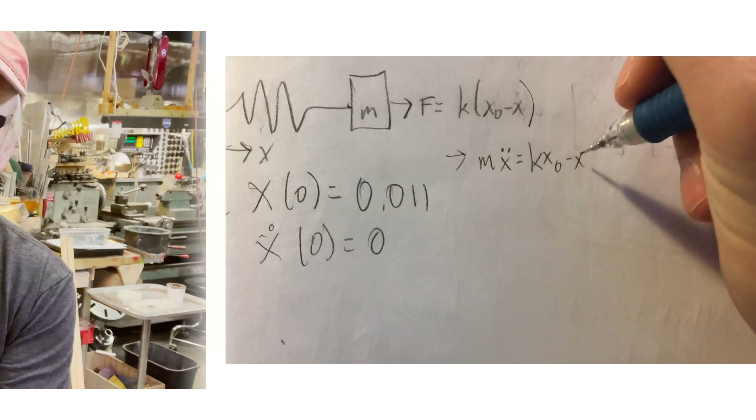But the most important question here is why? Why do we write it down? It's not just so we can show it off, it's so that we and others can learn from mistakes. Learning from mistakes saves time and money, and that is a very powerful thing.

In a lot of TV and movies, you'll see an engineer take a little bit of this and a little bit of that. Oh no, it doesn't work, just hit it with a hammer. Oh my god, what do you know? He's a genius. The data just doesn't justify this test.

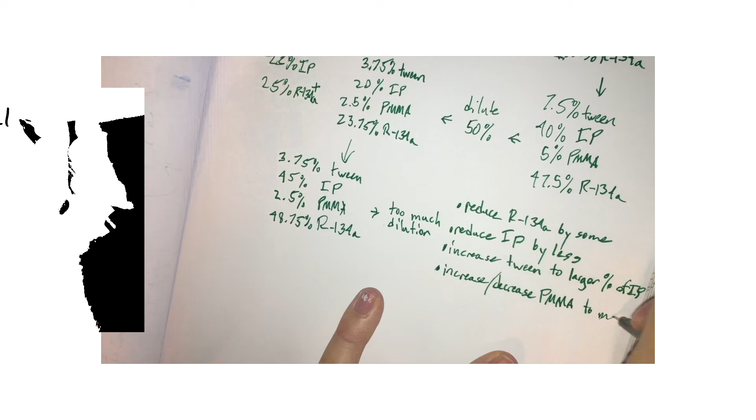Of course, in the real world, it doesn't work that way, as much as we'd like it to. No, in the real world, we can make predictions based solely on observations, and especially mistakes that other people have made. These observations have led to the mathematical laws I've presented on my channel before, which have been built up over centuries as extremely useful tools by experimentation, leading to even more observations. And the result of this is we don't have to rely solely on trial and error, which is an undeniably expensive approach. Instead, we can make predictions on how our designs will function before they're even built.

So if you're thinking about designing something new, my advice is sit with it for a little while. Make some serious predictions, challenge your own hopes for the design, do some modeling. If you do this, time and money will be on your side.

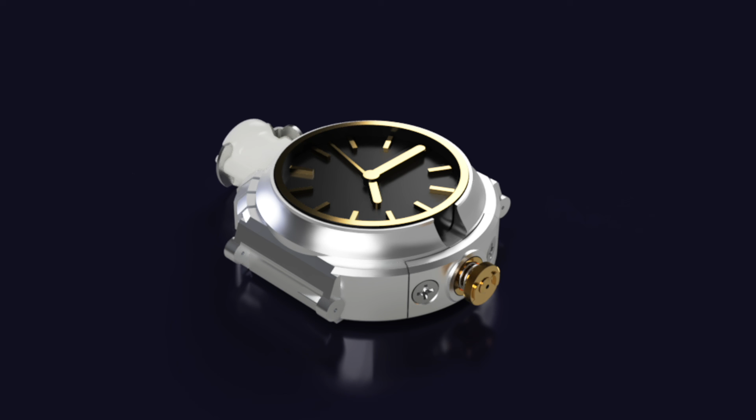This is the approach I took with this design. I thought, what can I do with current fluid web shooter technology that makes a unique and practical web shooter? I want concealability, I want performance, I want changeability.

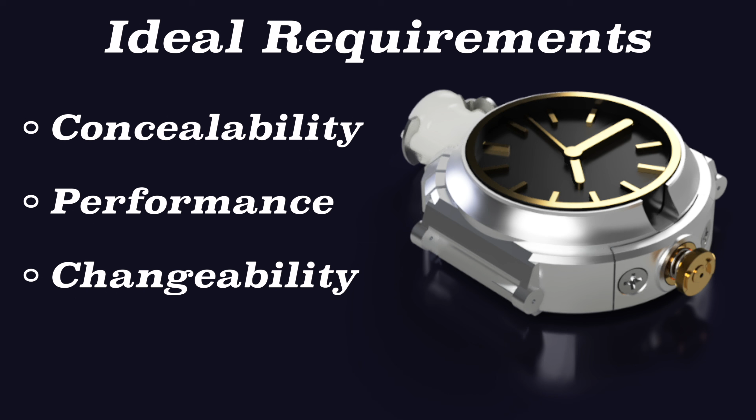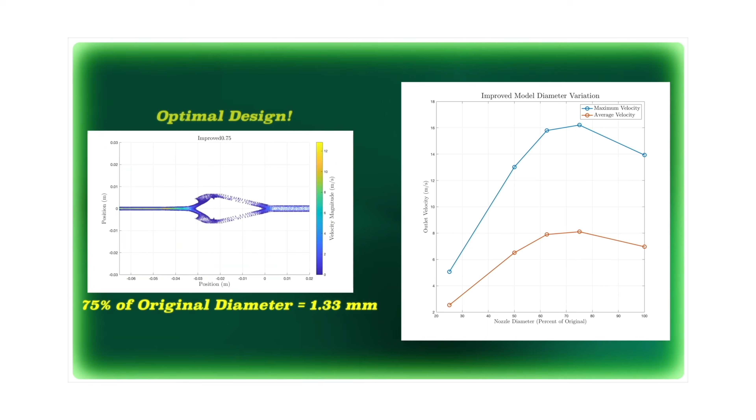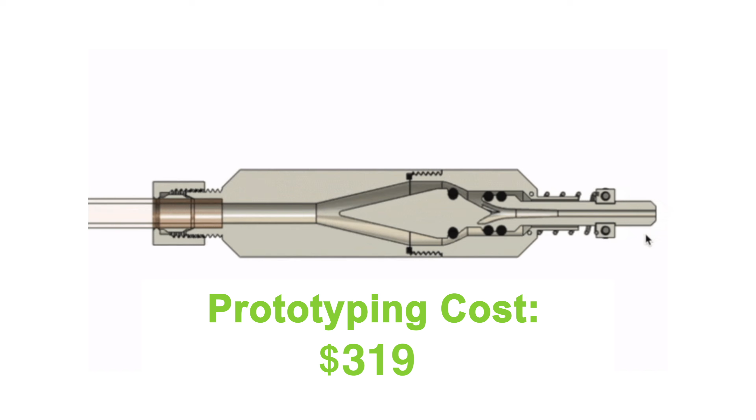Concealability definitely means the web shooter had to be small, and with my new research into the effect that common viscous fluid laws have on web shooter performance, I was able to consider the optimized valve geometry I presented in my last video. I designed a valve with this exact geometry as part of a push toward product development for dragline dynamics. If you don't know what that is, just please watch any number of my videos from the last few months. But the prototyping costs were too high, so I figured making a smaller version of this was the perfect chance to accomplish concealability and cut down on material costs.

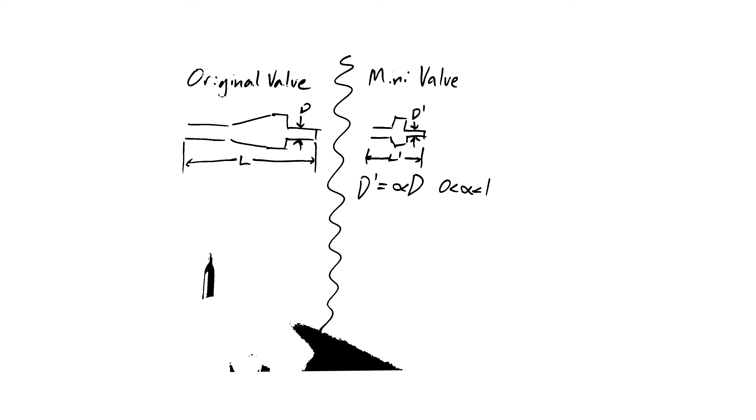I assumed the scaling law for viscous fluids to be the Hagen-Poiseuille law. That is, I hypothesized that I can make this valve perform similarly while decreasing the size. Decreasing the radius hinders the flow, but decreasing the length helps the flow. A similar flow with the same pressure drop and fluid properties means that the ratio between the fourth power of the radius and the length must remain the same. So whatever factor by which we scale the radius down, we must scale the length down by the fourth power of that factor. This scaling gave me a new valve, which is simultaneously small but theoretically does not sacrifice performance.

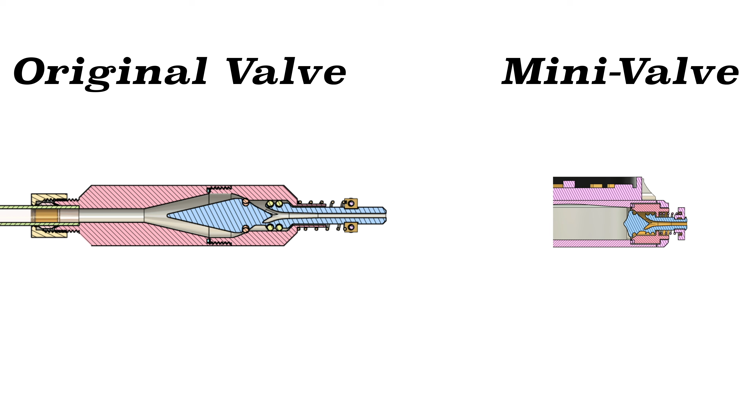Concealability also requires that people aren't asking why you're wearing an unmarked hunk of metal on your wrist. So I figured, why not make this web shooter a watch that actually tells time? I find it funny that this is the opposite of what was done in 2012's The Amazing Spider-Man.

But then of course, if it's a watch, watches don't have long tubes coming off of them like I have with my web shooters, which I have of course so that I can hold more material without increasing the moment of inertia of my arm super dramatically.

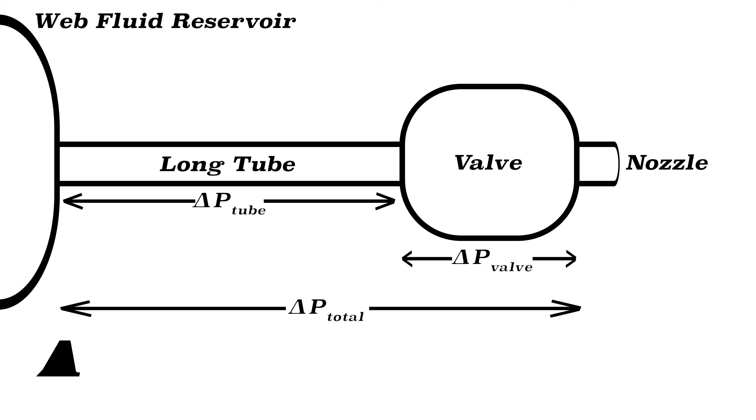But the tube also theoretically would worsen the performance of the web shooter, as the fully developed flow in the tube induces a pressure drop, so the drop across the valve is not as dramatic. So I could get rid of the tube and have a fluid reservoir in the watch. This is something I've never done. I've always had some sort of canister external to the main unit.

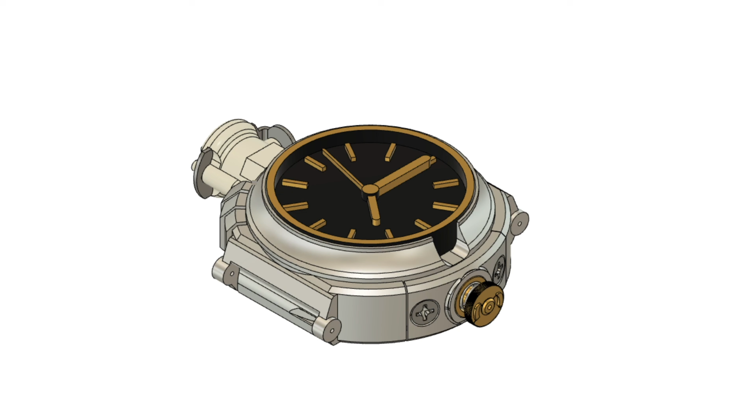Having the fluid reservoir lead directly into the valve will significantly reduce the pressure drop that occurs before the valve, dramatically increasing the pressure drop that occurs across the valve, which increases exit velocity. But of course, the watch unit itself won't be able to hold a lot of fluid, which makes the whole thing sort of pointless.

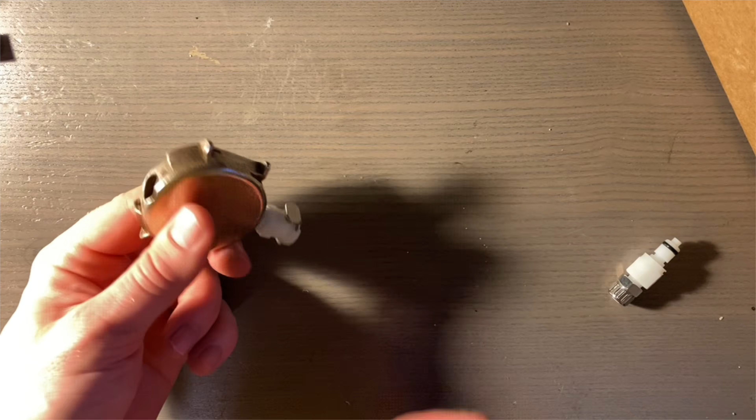But I found the solution, something I've always been looking for: the ability to have plug-and-play web fluid cartridges. I'm talking about the classic 'shoot, I'm out of web fluid, better put another cartridge in,' and it takes five seconds, just plug it on in there. These cartridges can be anything you want, as long as you have the correct adapter, just like an HDMI cable. I've attached my old ARM canister and tube to this adapter, and it works great. Both sides of this quick connect are automatically shut off upon disconnection, so only a small amount of fluid is lost during cartridge switching, and the web shooter can function whether or not the cartridge is connected.

So there's my design. It's time for manufacturing. As I alluded to earlier, I'm very interested in product development for you guys, and this web shooter is a great candidate, easy to use and concealable. But this is far off. This project is currently just in the prototyping stage.

Shapeways is a 3D printing service that allows users to open up a shop and sell their designs through the website, so I figured this may be a good way to get started. I paid a lot of money to get all the necessary parts made by them in a variety of their materials and processes, just to see if their manufacturing was up to the task.

So I just got this in the mail, the valve stem for the design, and I got it made in aluminum. As you can see, the quality is not great, which is okay - they probably don't usually get parts that need to be this small and intricate.

Whether or not it will work, I can't say for sure. I can confirm that the necessary geometry is here, it's just not great. If I put a little piece of plastic through the nozzle, you can see it comes out where it should. So there's definitely a cavity in there, as there should be.

The back is probably the roughest part, so I was just polishing it. The O-ring slots are a little wonky as well, but all the features that should be there are there. It's just a matter of will it work. Nothing really needs to slide against this because there will just be O-rings around here. But of course it is kind of crucial that the O-ring slots are circular. If they're not, it won't seal super well, so we'll just have to see.

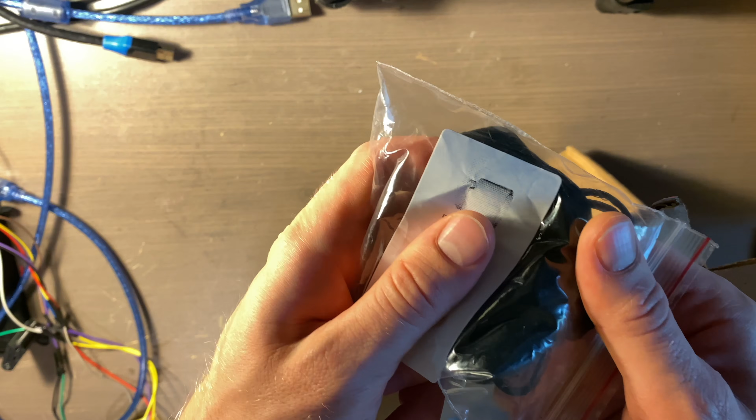I just got this in the mail - it's the rest of the parts for the web shooter from Shapeways. Let's take a look at what's inside. Okay, so we got a part here, that's the valve housing. We got one part of the nozzle head, another part of the nozzle head, and then this looks like the steel parts. It's very heavy - we'll talk about the weight in a second. And then it's just some bubble wrap. You can see I've already put the O-ring on the bottom here that's supposed to seal with the nozzle housing, so it should be interesting to see how these parts fit together.

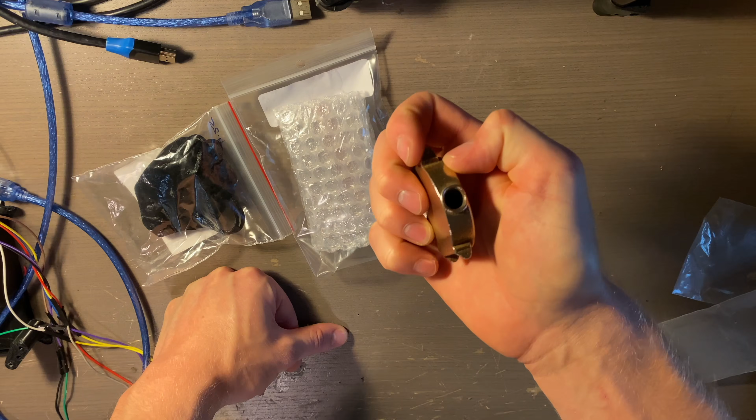So I ordered the hand polishing, and this is steel - I believe it's silver steel with bronze. It's pretty heavy. I would ideally get this in aluminum, but it's not polishable. Brass is actually even heavier. This was actually the cheapest option to do it in steel, and since I'm doing a prototype I want it to be as cheap as possible. It was still pretty expensive, so go support me on Patreon. Looks like it's actually hollow, so that's actually a chamber in there for the web fluid to be stored.

So the big question here is, does the fitting that's required for the web shooter fit into this? The fitting should hold up to just over 100 psi, which is pretty much right over what we need. Maybe? No, it's crooked - interesting, okay. So it's not the best with thread detail. I do want to point out that this is FDM 3D printed, and this fits the fitting just fine without any sort of finishing. So yeah, it seems that your average FDM plastic PLA 3D printer can make better threads than this metal 3D printing technology that they use.

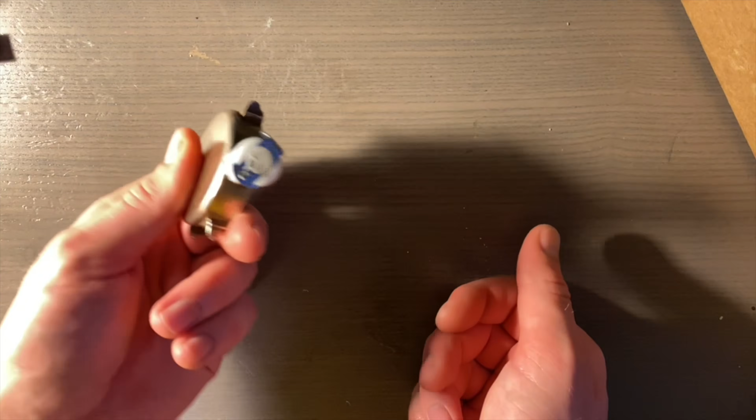So that can be tightened with a wrench, but there it is. So that's that quick connect. Boom, cartridge, and then boom, no more cartridge.

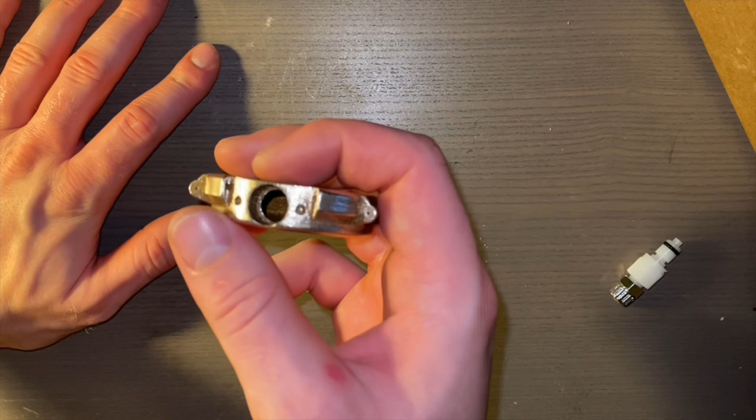When I was at the shop, I figured I would also tap these two holes, which are supposed to be M3s. I don't know, either the threads aren't even there or it's just not going to happen with these guys. That's a little bit disappointing, and I won't be able to see it function today because of that.

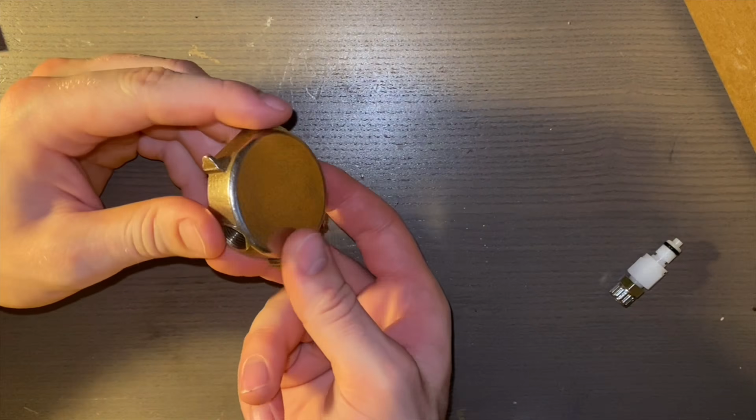So also while I was at the shop, I decided to file this hole a little bit. That's where the valve goes. It's a little rough in there, so I wasn't sure if the valve housing will fit. Seems like I smoothed it out a little bit, so let's check on that.

So for the valve housing, I got it in polished brass. They give you a nice little bag for the polished brass, because I guess usually people make jewelry with it, which is kind of nice. Oh my gosh, look at this. That's beautiful.

Look at that finish, they polish it for you and everything. So it looks like this manufacturing process is supposedly wax casting, and that's very accurate, surprisingly. So let's see if it fits in here. Oh, it does. Okay, look at that. That fits very nicely.

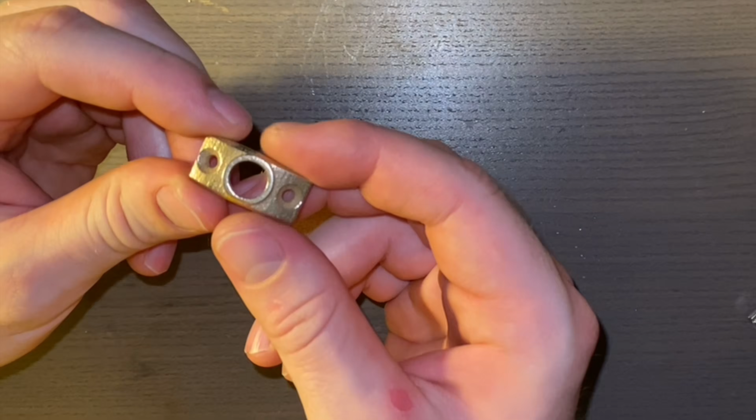Incredible, okay cool. So the next piece we need to look at is another steel piece that I also got polished, and that's this one. You can see it looks like they printed it like this, because you can see the contour of the layers, making some lines here going up and down like that.

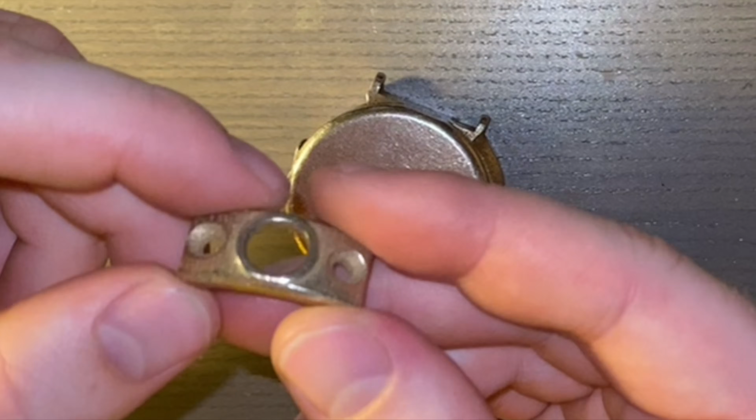But it's not too bad. Polishing definitely does it justice, especially on this side and this side, they're flat. There's a little bit of a burr there, so they didn't deburr it entirely, which is not super great.

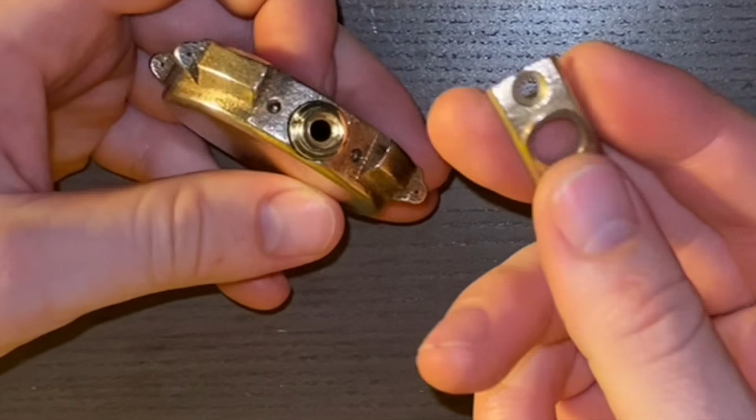Okay, so the valve housing brings us to the valve itself, which is sort of a sub-assembly. There are 3 O-rings supposed to go around the valve stem. These 2 are for sliding seals, to keep stuff from leaking out when open. And this is the sealing O-ring for the closed position.

Okay, first one fits pretty well. Next O-ring fits pretty well too. Then the real question is how they seal against this brass. This is pretty smooth, they polish it. It actually looks really nice on the inside, but it doesn't really matter.

Oh, actually it fits, I think. Looks like it fits. So the friction between the rubber and the brass does make it a little bit tough to open, but it seems like it works, and yeah, those 2 O-rings are still right where they're supposed to be, so they didn't pop out.

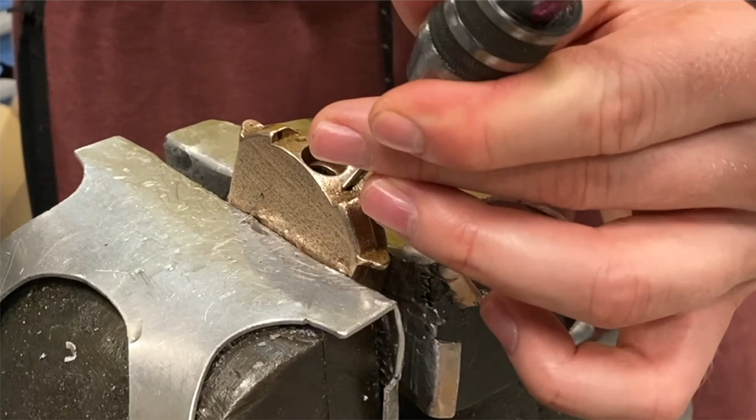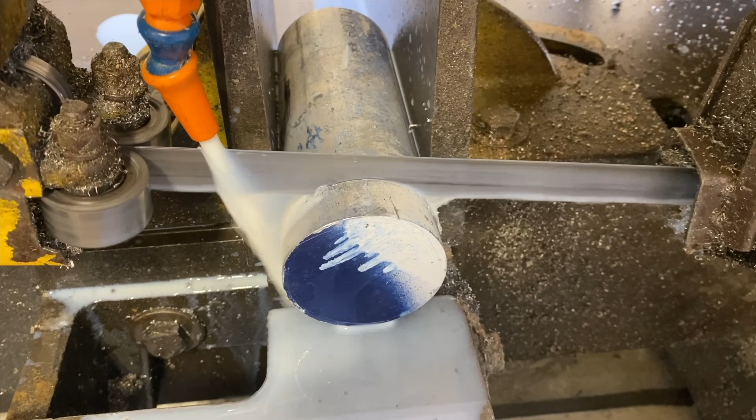I still had to make a prototype, so I made plans for a manually machinable version of the part, and this time I'd use aluminum. Beautiful, beautiful, beautiful aluminum. This means the part won't oxidize, and I can ensure it has the correct threads.

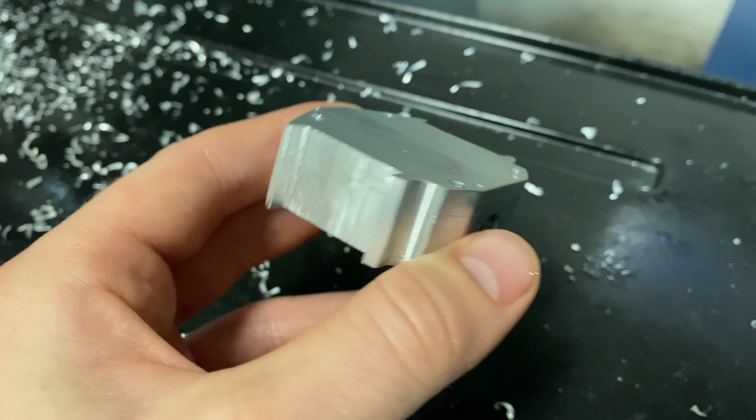Sadly, machining requires that parts not be hollow, meaning I have to make a pressure chamber in 2 parts, the body and the lid. Eventually, 3D printing the body with metal processes would be a great advantage, as it would allow some size to be chopped off the top.

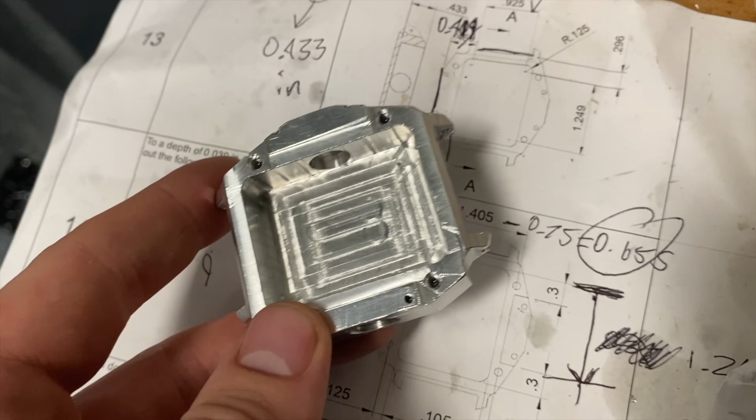After adding some hardware for the watch and designing a removable trigger system, we had our web shooter.

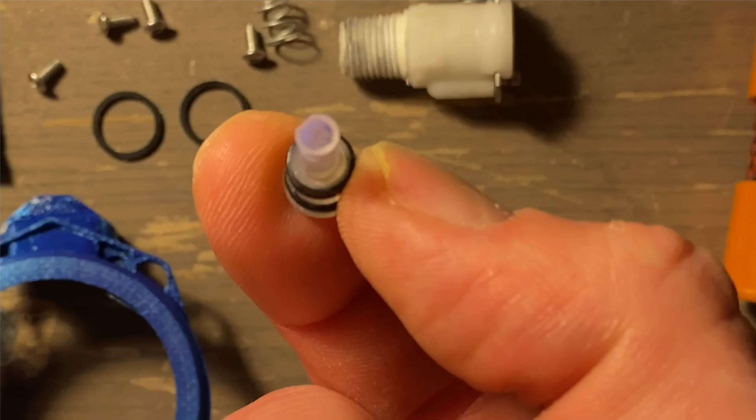The aluminum valve stem seemed to have some problems at first, so I reprinted the shape in clear SLA resin. I actually went through a ton of iterations with that, so I won't get into it. Basically, the problem turned out to be the main O-ring being blasted out of place by the flow, so the aluminum valve actually probably would have been fine.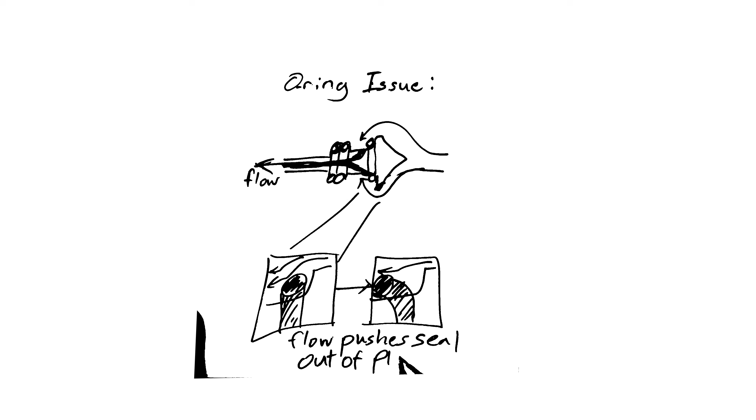But the SLA technology is so much more accurate than the selective laser melting used for the aluminum, so I stuck with it. Of course, the advantage of the aluminum is it's generally more chemically compatible than plastics, so it opens the door for more types of web fluids.

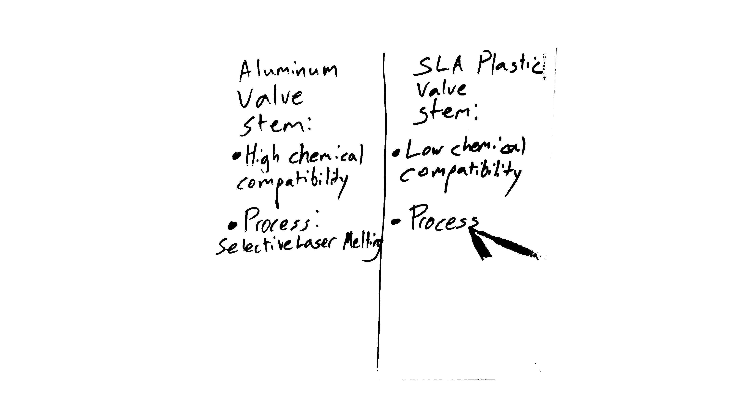Now remember, this end result is just a prototype, but it already works quite well. High exit velocity, small body, configurable fluid containers, it only gets better from here.

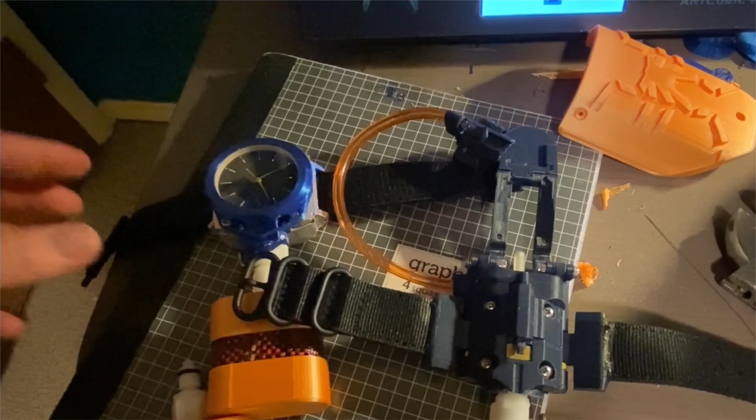Let's do a final teardown of the device. Alright, so here we are with the little tiny watch web shooter unit. Now, as you can see, it still tells the time.

The cartridge that I made looks like this. Gave it this nice orange appearance for my color scheme. I don't really have a robust test for these yet.

So the cartridge fits in just like this, no problem, and you can remove it just like this. I've actually just cleaned it out with a cleaning fluid, so it's getting ready to be filled with new web fluid for future fluid tests that I'm planning. Stay tuned for that.

As you can see, we have a foldable trigger. It's a pretty easy, classic trigger design, since the trigger wasn't really the main task for this project. The cool thing is you can easily twist and remove it, and you're back to just a really disguisable watch design.

Alright, so the first thing that needs to be taken off is this 3D printed cover here. It's almost not recognizable as 3D printed, because it looks sort of like painted metal to the untrained eye and from far away. I've had many questions about this watch, people are just like, wow, what kind of watch is that?

And I say, it's a Kamanki. It's a cheap watch face I got on eBay.

We can remove the screws attaching this part, and you can see it only serves, first of all, as the base for the trigger, and also for holding the watch on. This part also serves a purpose out at the front of the web shooter here.

You can see that it reaches all the way underneath the front plate, and I did that to add it as a sort of spacer here to relieve some of the pressure. There are 4 screws attaching that to the top of the web shooter, and we should be good to open it up, and it should be fairly clean.

You can take the front plate off. Now that's attached with these 2 screws here, these are M3s, so this is a crucial load-bearing component. This is not aesthetic. These screws attach this front plate to the front, and then we have our valve.

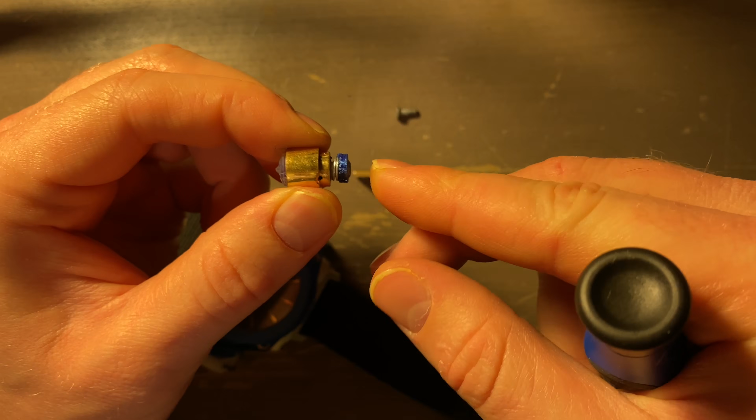So this is the valve. It's freaking tiny. It looks like it's held up pretty well, nicely sealed. We can do an actuation of it. Yeah, so that's how it operates. That's the valve right there.

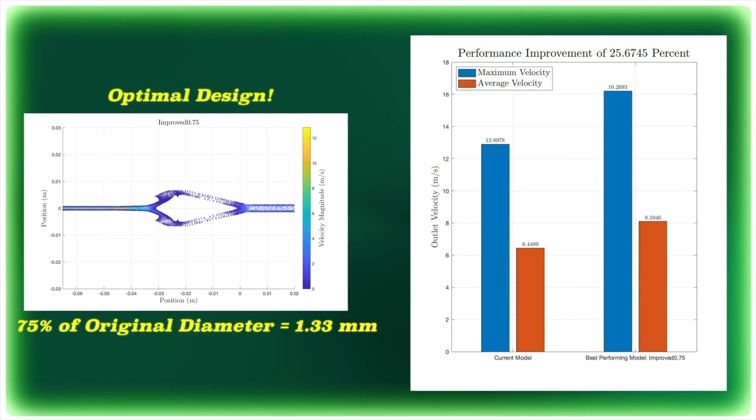This valve has a miniaturized version of the optimized geometry that I presented in my fluid dynamics video that I discovered. Where that sits, we have an O-ring that seals against it. So the O-ring sits right here on this lip, and the valve sits against that, like so. And then the front plate sits over that and presses it in with those 2 screws, and that is how we get our seal to attach the valve.

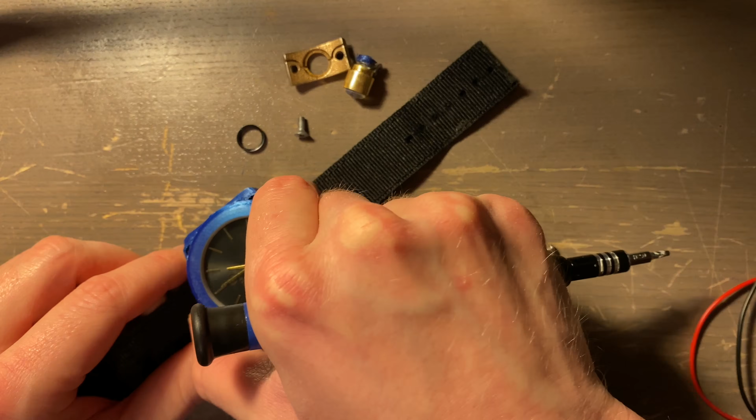So it's pretty cool, let's pop this off real quick now that we can do that. Alright, so there's the watch part, and the rest is just the web shooter right here, an aluminum body, I machined it myself. We'll get to that in a second.

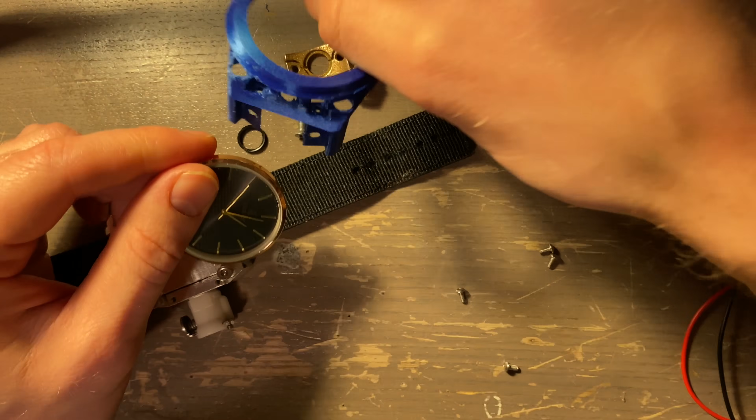Here is the watch face, so this just pops out. You have the 3D printed part, and you have the watch face. I cut the wristband holders off of this watch face, and this is one of the thinnest watch faces I could find. Did we go an hour back or an hour forward?

So it's a surprisingly clean operation to rip this apart and put it back together again, considering the mess that this device is supposed to create. Now this is another crucial pressure component. Remove these screws, and this creates the lid, or the roof part, of our pressure vessel.

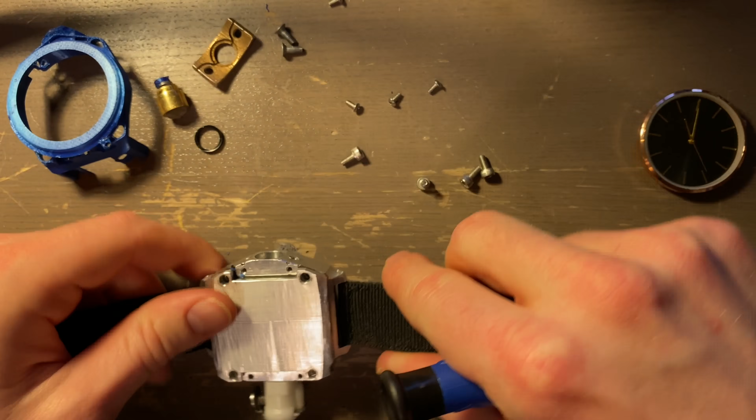Alright, and then it's sort of stuck on there, so let's just... there we go. Oof, okay, so an aluminum part here. I machined this as part of the same operation that the main body was machined.

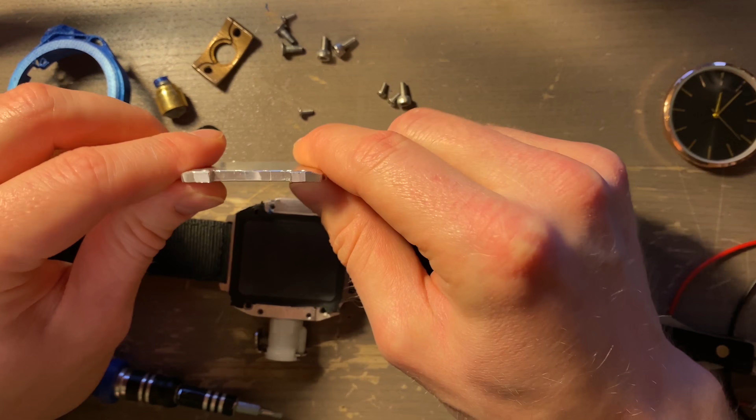It's about 1/8 of an inch thick. You might be able to make it even thinner, but I don't really try my luck. This seemed like a solid part, 1/8 inch thick aluminum is usually structurally sound.

The next part is this rubber seal, which fits really nicely. We were able to get a good seal. Looks like it permanently deformed, but you'll probably still be able to use this as a seal, because it was working just fine before. This is the inside of the web shooter.

So you can see I wasn't lying, there's a whole ass fluid reservoir in here. And if you compare that to these cartridges, I calculated this to be about 1/3 of an ounce, 1/3 of a fluid ounce. And in here is supposed to be 1 ounce. So this holds about 1/3 of this, so when you attach them together, you get to about 4/3 of an ounce right here. So yeah, that's pretty cool.

So this is the quick connect part that interfaces with the cartridge, just like this. This is the machine part on its own. Watch band - I want to replace this with a different sort of watch band soon, so we'll set that aside.

I machined this on a manual mill. These parts were manufactured by me, and I almost forgot, we have to break down the valve itself. This is a tiny valve, and it works fantastically. The inner diameter here should be less than 1 millimeter, but we still have a large exit velocity, and that's due to other improvements in performance.

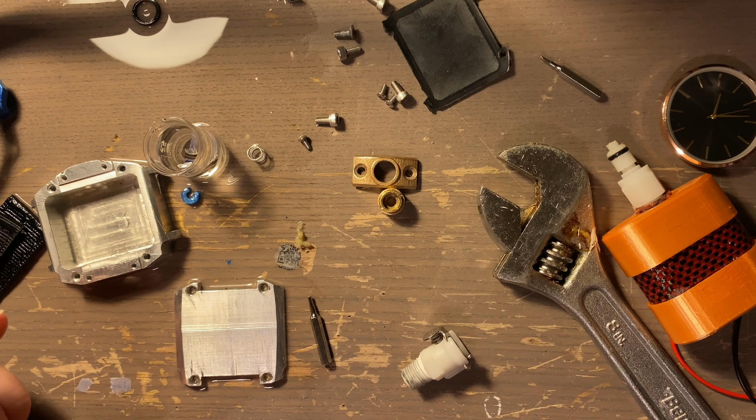The body didn't work, let me show you. The original body is right here, I still have it. I drilled a hole straight through in frustration, so this definitely wouldn't work anymore when I was trying to cut the threads where they were supposed to be in order to hold the front plate on.

Initially you can see that's supposed to go there. Instead I machined this, and that goes right there, and it works just as well, if not better. The weight difference between these two is really striking, because this is steel, this is aluminum, and aluminum looks way better too - this oxidizes.

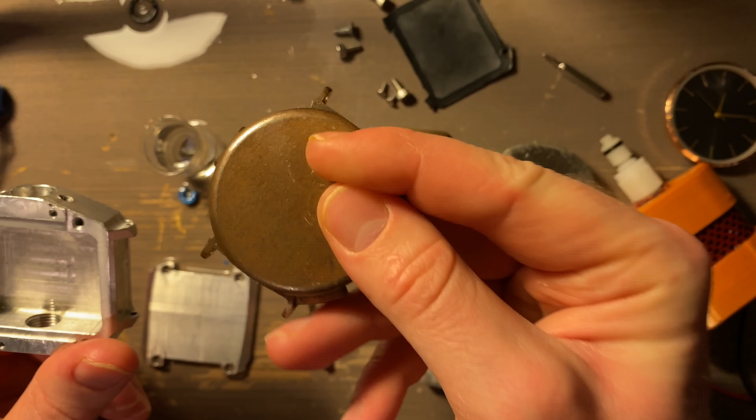The valve stem is really small, as you can see. There's 3 O-rings. This is from the Human Spiders design, to have 2 O-rings sealing against the wall of the valve body, like so, and 1 O-ring that seals in the closed position, but does not seal in the open position, just like that.

I can't take those O-rings off because I've cemented them on there with cyanoacrylate glue. As I mentioned before, they were popping out, which was causing the initial problem. So it could be that the aluminum valve stem would work fine, but this worked great, so I didn't change it.

But it broke, right? Out of the 4 parts I ordered from Shapeways - the valve body, the pressure chamber, the valve stem, and the front plate - only 2 were up to snuff for the final design: the front plate and the valve body. I had to make a pressure chamber or fluid chamber myself out of aluminum on a manual mill. That took a very long time, about 12 hours of labor total.

I'm really, really, really proud of the result. I'm not really a machining aficionado, but I wrote out a plan to create this super complex shape without a CNC, and it worked really, really well.

We have another part that I made, which is a watch holder. I think I'm going to modify this so it doesn't stretch down here, that's kind of unnecessary. I also cut out this rubber piece to serve as the seal between the body and the lid.